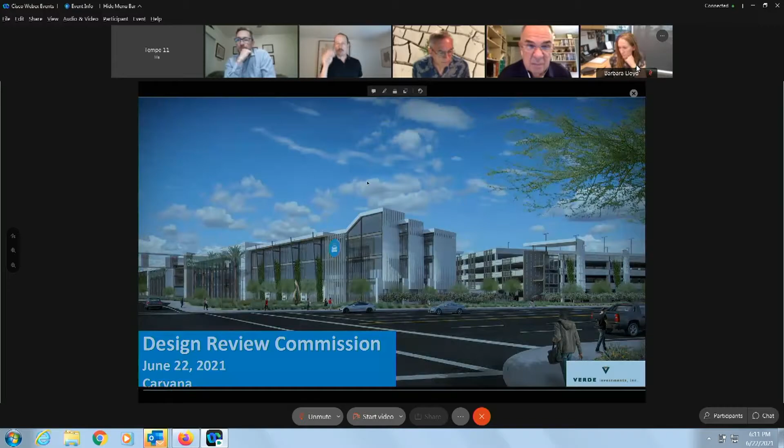As many of you already know, Carvana is a locally owned company already headquartered in Tempe. They are nationally recognized, a publicly traded company with a market cap of $50 billion - that is a B, not an M. They really are an industry leader in car sales, certainly in a post-COVID world. They have a tremendous impact.

The site we're here talking about today is at the southeast corner of Priest and Rio Salado. It's approximately 15 acres in size. It's been underutilized and sat vacant for quite a while, and it's been a pretty complicated site to develop. Luckily, Verde has been able to put the parts and pieces together.

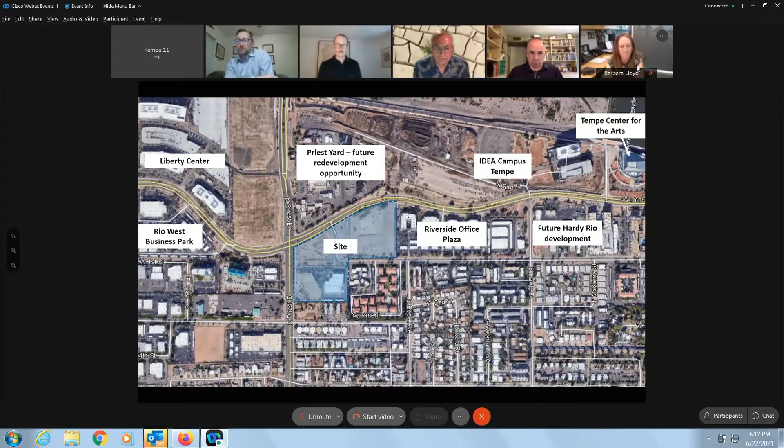To put this in context, it's always helpful to see it laid out on an aerial. To the north, you've got the existing Priest Yard, which presents a pretty amazing future redevelopment opportunity for the city of Tempe. You've got the Liberty Center, the IDEA campus, and the Riverside Office Plaza to the east, Tempe Center for the Arts, and a recently done transaction between the city of Tempe and a future development you'll see coming to the commission soon for Hardy Rio.

We are here today seeking a planned area development overlay from the existing GID PAD, and we are seeking development standards to accommodate this new corporate campus - this office development - related to height, setbacks, lot coverage, landscape, and parking. We're also seeking major development plan review, so the design review is actually approved for the office development.

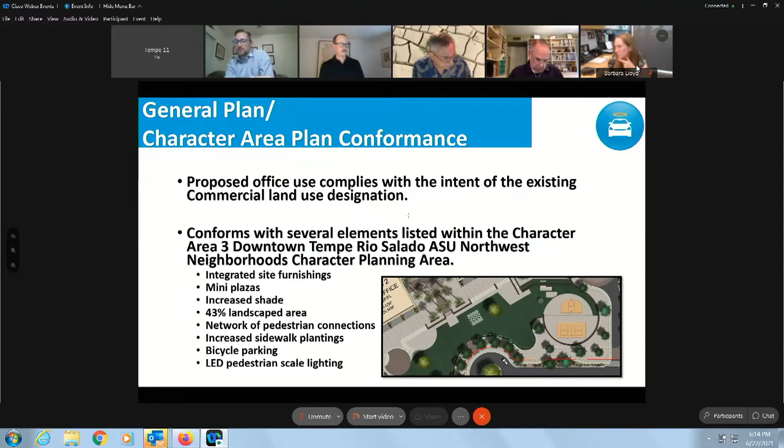Our proposal today is consistent with the existing general plan, with the intent of the existing commercial land use designation. It also conforms to many elements of the character plans - I'll highlight a few of the Area 3 Downtown Tempe Rio Salado ASU Northwest Neighborhoods Character Area Planning Area. It's got a pretty amazing open space concept with integrated site furnishings, a mini plaza, increased shade, and significantly landscaped area at 43%. It's got a network of pedestrian connections, increased sidewalk plantings, bicycle parking, and LED pedestrian scale lighting.

Our proposal here today, for headquarters for Carvana, is intended to be for their C-suite folks. This is going to be 2 new 300,000 square foot Class A office buildings. You'll see 2 new parking structures, which will include charging stations. There's centralized amenity space. I do want to be clear that there is no vehicle storage, no retail sales, and no call centers occurring here on site.

I also want to point out one of the constraints we've had that I think we've been able to successfully incorporate - we are using that existing building you see as existing building 1. So in the end, there will be 3 office complexes here along with the 2 garages around a centralized courtyard amenity area.

Again, the 2 3-story office buildings, you see it blown up a bit here, that existing office complex, and the 2 parking structures intended to be conveniently located and serviced for those office buildings. You've got central amenity space. We do plan to take advantage of some public art, most likely in that central amenity space, and then pedestrian connections through this corporate campus.

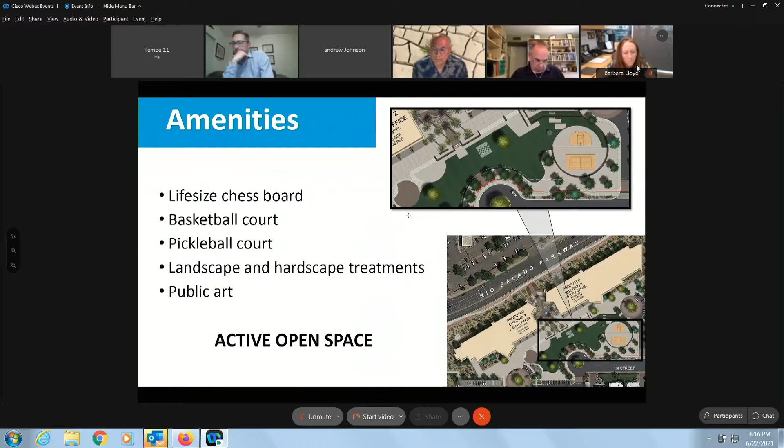As I mentioned, the amenities here are pretty spectacular, and they're what you would expect on a super cool corporate campus. You see a life-size chessboard, a basketball court, a pickleball court, landscape and hardscape treatments, and again, that public art. This is very active open space intended to be that central amenity for this overall corporate campus.

One of the other questions that came up as I was talking to folks today had to do with the garage screening and what that would look like. So I pulled some snippets from a video we have, frankly because I was afraid the full video would crash the system, and I'm out here on my own trying technology. So you can recognize there's no landscaping in these at all. It's really just intended to show you the architecture. I think it will be an even greater enhancement when you see the landscaping plugged in.

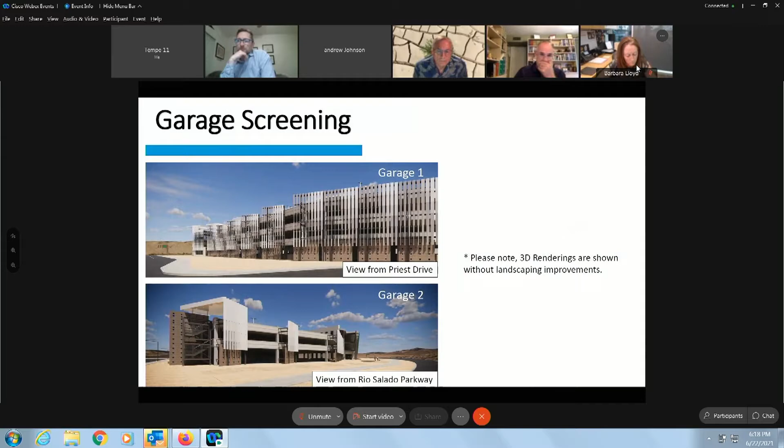But I think what's particularly interesting and cool, when you look at this screening, these kind of metal fins, as you drive, they give that sense of movement. They seem to kind of glide along, and that's part of the idea behind the architecture. Next.

So in general, we are in agreement with the whole staff report. We appreciate the opportunity to work through this, but we do have a question, and we would like to remove the PAD condition of approval number 4. It does say the maximum allowed parking for this is 1,411 spaces. I would point out that there is no maximum allowed parking, that maximum applies only to surface parking lots. And here Carvana is actually providing two parking garages, as we have mentioned.

Certainly this is not a spec building. This is for Carvana. They know how many spaces they need. They've been very clear about it. This is a large and active campus with increasing need for employee parking, and they're looking to hire over 1,000 new employees. In fact, the parking ratio that we're seeking is the same as the IDEA campus immediately across the street.

So we would ask that that condition be eliminated. I did want to share that Carvana does actively use a program called Share the Ride, where they provide incentives for employees who use Share the Ride. It's a ride matching system for commuters to quickly secure commuting options.

And lastly, we did have a virtual neighborhood meeting on this site on April 20th. We had one resident in attendance, the HOA president for the Rio Salado Villas, and he expressed support for the case. It was a very good conversation. We really appreciate the support. And in fact, I believe the card you have on this case, unsolicited, is also in support.

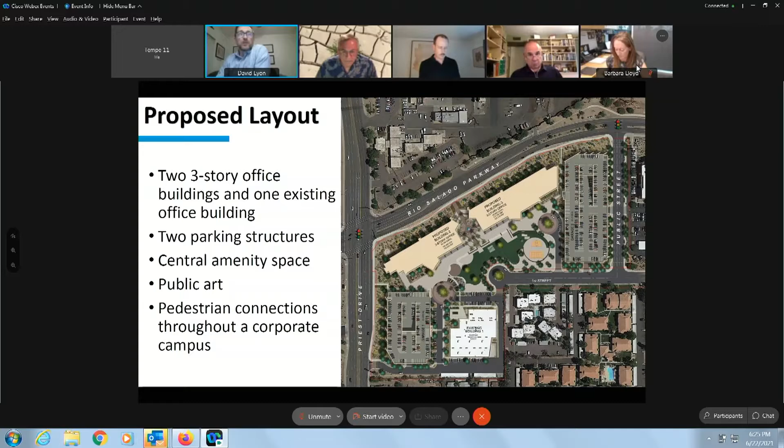Thank you, Mr. Chair. Okay, anyway, that was just my musing there. Any other questions or comments for our applicant? Okay, seeing none, well, thank you for now, Ms. Riddell.

Let's ask Ms. Diana Kaminsky. Good evening, Chairman Lyon, Commission. Do we have the presentation, Greg? Can you guys hear me okay? Okay, thank you. As Wendy indicated, this is a planned area development with a development plan review that includes 1 existing office building and 2 new 3-story office buildings and the 2 parking structures.

The square footage shown here is for the total square footage. I've provided a diagram showing what property is currently owned by the City of Tempe. We have an agreement for sale of those properties, and the portion that is the existing First Street alignment would be dedicated right-of-way on the east side of city-owned Lot F. I just wanted to point out our relationship to the existing configuration of owners. If we can go to the next slide, please.

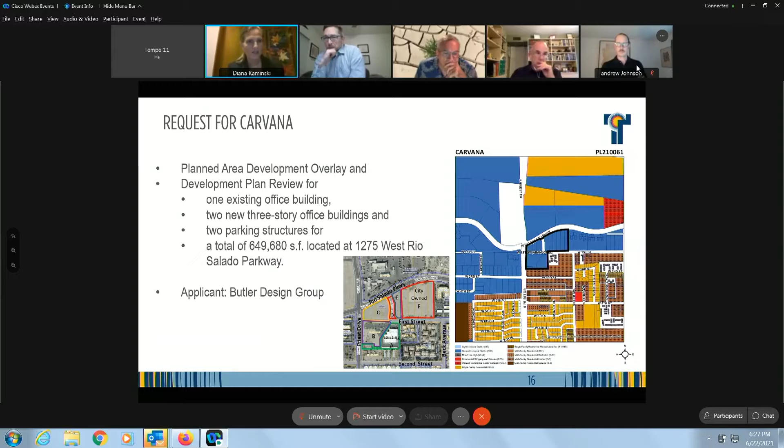Ms. Kaminski, can I interject for a moment, please? Sure. I now see a conflict I'd like clarified. Your previous slide showed a total of 650,000 square feet, and Ms. Riddell just told us it was 350,000 square feet. This is the square footage of the property, I believe, and then there's a different number that includes the square footage of the garage. I think you'll see the breakout on the next slide. Okay, thank you.

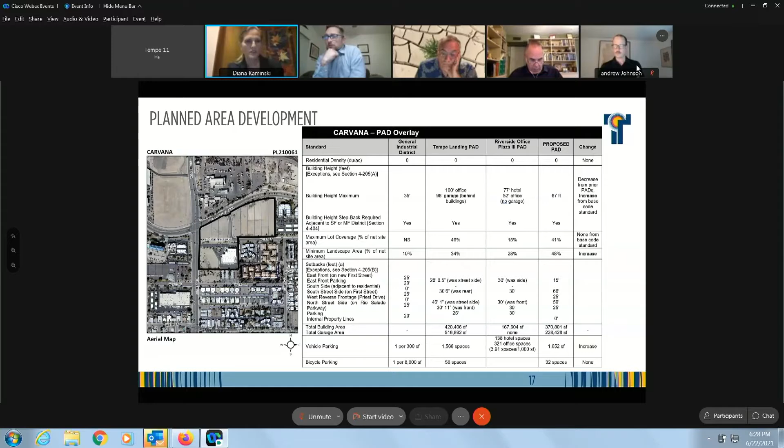So down here under the total building area, we have 420,406, and then the total garage area. This was an addition, excuse me, that's the Tempe Landing PAD. So this is a comparison of the existing PADs, and on the far right you can see the proposed PAD with 370,801 square feet of office building and 228,428 square feet of garage. I'm not sure where the ratio of 1 to 300 came from, because when I did my analysis it came out higher than that. I do have some slides that talk about the parking ratios. They're not asking for a change to the PAD standard or the parking ratios, it's just that the parking requested was significantly higher than what our normal ratio would require. Next slide, please.

So the office area is shown here with the parking code that we have of 1 per 300 square feet, for a total required of 969 spaces.

Wendy did indicate that we do not have a maximum, and that is correct. When I did the analysis, I was just trying to show if this were a surface lot, we do have a maximum surface parking ratio of 1.25 that we use when calculating a maximum for surface parking, but we do not have a maximum for structured parking.

This provides a bulleted list of the percentages of increase over the base minimum code requirements for parking. Obviously, the office market does demand a higher ratio than what Tempe requires, and we've seen that over the years, and these are all within the area. It gives you an idea of the percentage increase we've seen for similar character of class office in this particular area. What struck me was that it was significantly higher.

I recognize that it is a vehicle-oriented business, but they were at 70% above what the code required as compared to some of these other projects in the area. Next slide, please.

This shows you the overall site plan with the existing building and the 2 parking structures and the 2 new office buildings. Next slide.

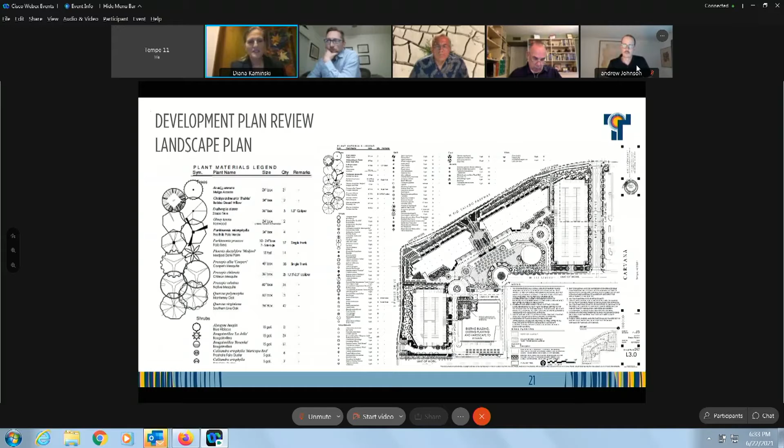And this just shows the existing office building and the character of that office building with the existing landscape.

Next slide. And the proposed elevations for the office buildings, which are very sculptural and use a lot of different materials in a very cohesive way. But as Wendy mentioned, they also provide a lot of rhythm and movement within the building itself.

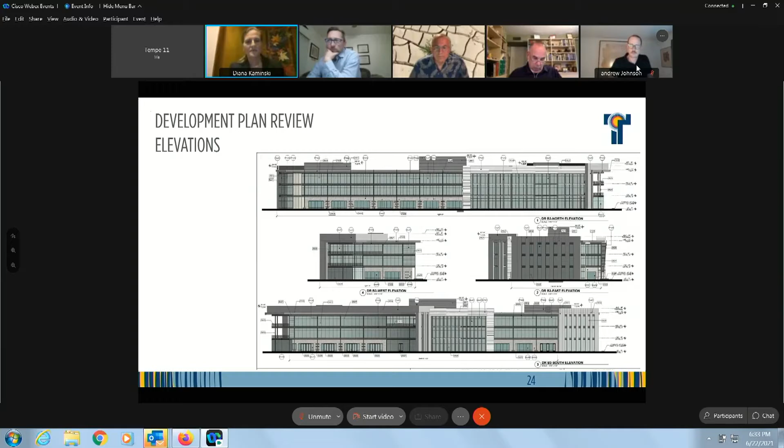This shows the relationship of the garage to the buildings. Next slide.

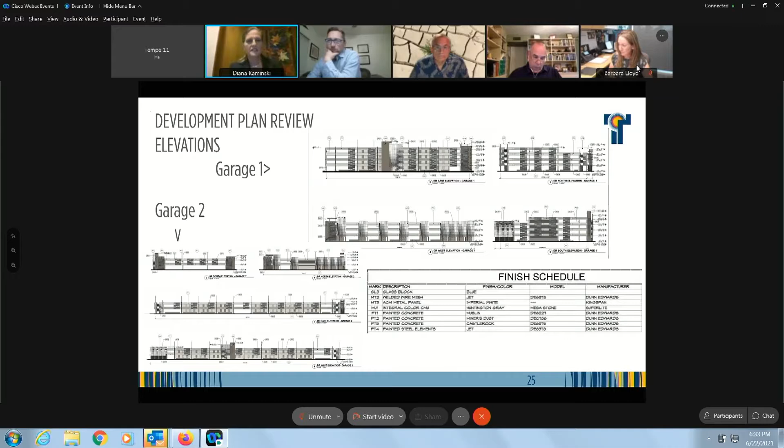And these are the street view elevations. Next slide.

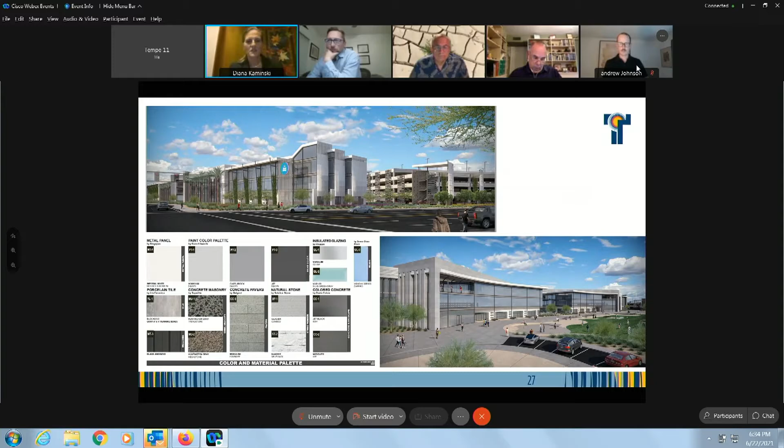And their materials and the renderings, which you've already seen. Next slide.

They did have a neighborhood meeting. I did attend that. It was a very good conversation with the representative from the HOA adjacent to this area. And the comment card that I believe Suparna will probably read out loud was from a representative of Riverside Neighborhood Association, and they were in support of staff's conditions related to the landscaping, and their concern being to provide as many new trees as possible to this area. Next slide.

So we are recommending approval with conditions, and these unique conditions are outlined here, and the only one that the applicant has concerns with and would like to have removed is number 4. But I believe they're in agreement with the rest of the conditions. Next slide. Which were mostly related to the trees. Next slide. And I'll be happy to answer any questions.

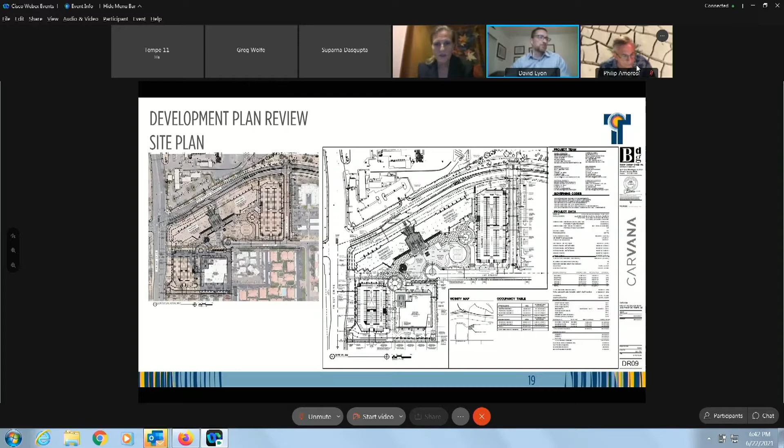Yeah, we can zoom in here on the PDF. It's about 48 feet. Is it 40? Did you say 48 feet? I see 58 from - well, I'm not sure exactly what that is. It's like partway on the sidewalk, it looks like. But from the center of the street, it's 113.

Right, sorry - we would be looking at the distance from the property line to the face of the building, the area outside of the right of way for the setback. Okay, that's the 58 feet then. It's a little unclear here, but that's got to be what the 58 is measuring.

And then a large portion of that - I don't have the drawing in front of me - a large portion of that is the utility corridor. Right, I see a 43.3 BUE. Yes, that's it. So the trees have to live in that 15 foot space. Yes. I see, okay, so I understand that concern better now.

And it doesn't look like there's room to shift that parking garage to the east in any convenient way either. Okay, all right, I think I understand why you had those suggestions that you did. Thank you for indulging me. All right, any other questions for Ms. Kaminski?